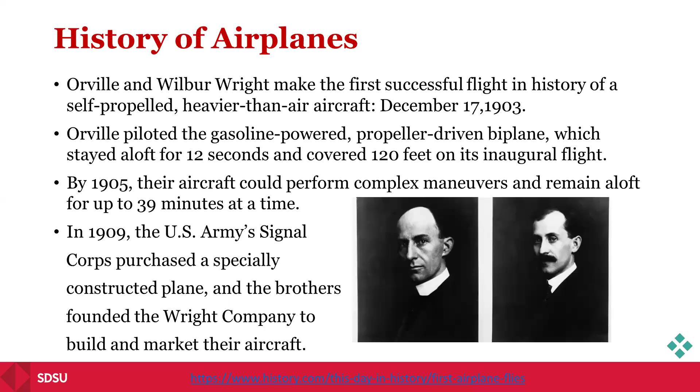And if you look back at airplanes, we have a lot of advancement in the past 100 years. But of course, the most progress was made in the early 1900s, when the Wright brothers invented the first airplane flying for 12 seconds, and then later on we moved on to propeller airplanes, and then we have jets, and now we have supersonic fighters and all kinds of airplanes.

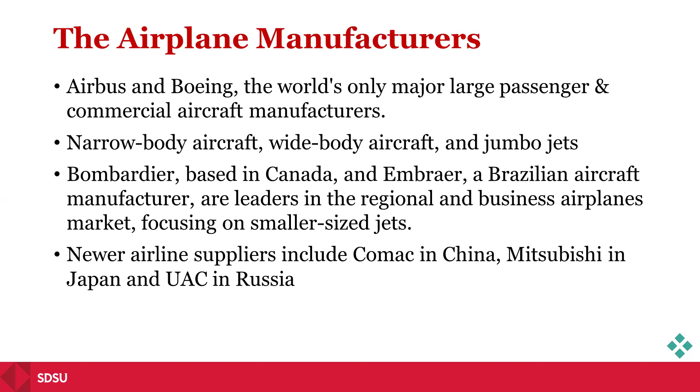But if you look at the manufacturers, there are really only 2 manufacturers in the world right now. One is Airbus, the other one is Boeing. They make commercial airplanes and also military airplanes. You have some smaller ones, like Bombardier, they make smaller jets. There are also some new airplane manufacturers emerging, but it's going to take them some time to really take the market share, like there's one in China, the C919, there's one in Japan. So they're doing some great work.

But if you look at the airplane industry overall, we have a few issues we might actually not notice. One of the issues is emissions. You might not know that on a per passenger per mile basis, an airplane emits more than the passenger car. Because air transportation becomes more and more popular, even though right now air traffic emission counts very little in terms of total CO2 emissions, over time this is going to increase 4 to 5% every year. So therefore, it's going to become more significant in the near future.

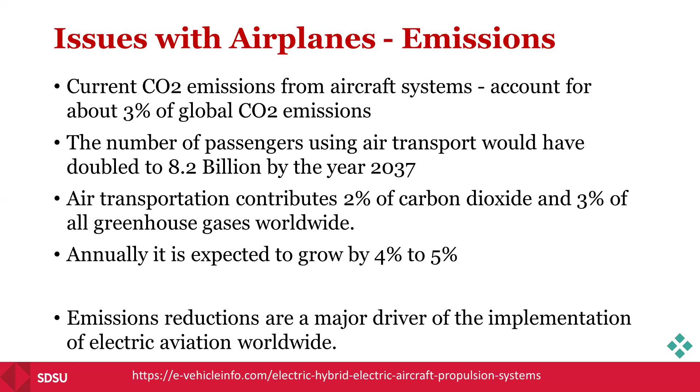And the other aspect of airplane emission is that most of the emissions happen in the air, which has more impact in terms of global climate change than the ones on the ground. It takes time for those things to travel to certain places, and it's global. It's not just emitted in the US and impacting the US, but actually it moves with the atmosphere to different places.

So with all that in mind, there have been talks about transferring airplanes to be more sustainable. The ways to do that include sustainable aviation fuel, where instead of using jet fuel, you produce fuel from food waste, things like that. But then more talk is: can we do electric? If we can do electric, and if we can produce electricity from renewable energies, then we'll be solving this emission problem. Right?

But if you look at one of the airplanes as an example, I took the 747, probably not the largest, but one of the largest airplanes. And if you look at the fuel consumption, it's equivalent to about 56 miles per gallon per passenger, right? So that's what I'm saying. It's probably worse than a passenger car. For a passenger car, if you take 2 or 3 people, it will be much less than that.

But if you look at the total energy consumption, it's 2.4 gigawatt hours for the airplane to fly one way, for its whole distance, say from Los Angeles to Shanghai, one full flight. That's a lot of power, because a lot of power plants only generate a gigawatt, and it takes about an hour to generate the whole electricity needed for flying one run, right? Of course, generation is actually not a problem.

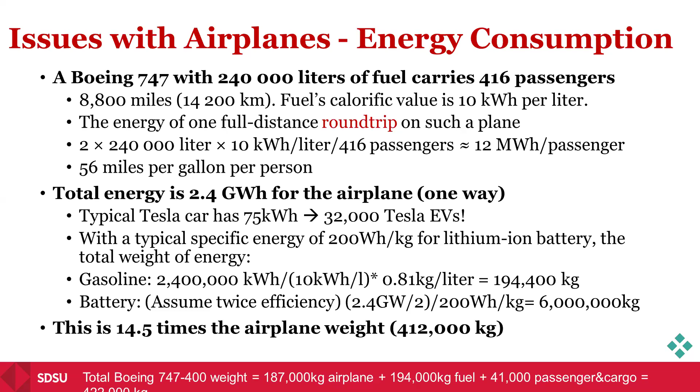Okay, so that's the bottom line: it is not likely to happen with the current battery technology. But we have been increasingly using more electrical power in airplanes. You can consider a lot of the entertainment system, de-icing, also maybe a lot of flight control, things like that. They're more electric, but they're not electric airplanes. So that concept is called more electric airplanes. We're doing more electric than we used to do, say, 10 years ago, 20 years ago.

We're doing more. When we do more electric, we need more electricity. And that electricity right now is generated from the gas turbine. The gas turbine drives the electric generator, and the electric generator produces all the electricity you need. And also you have an onboard battery to supply power when the engine is not working or working at extremely low speed. So you have a lot of this electric equipment. You have generator, and then you have battery.

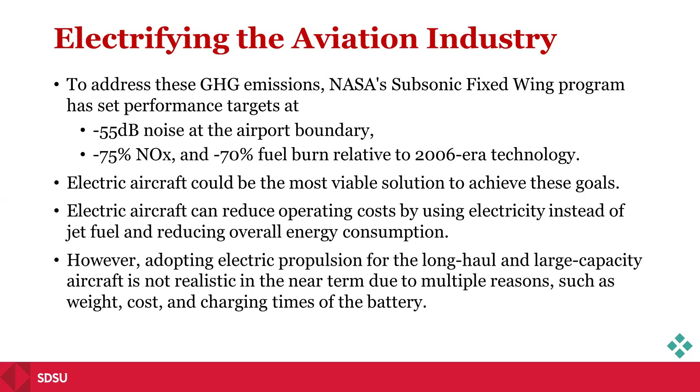The Boeing 787 is the first one to put a lithium-ion battery on it, and also the first airplane that had the issue with the battery being on fire, and they had to address the issue for some time. So doing more electric really is just helping the airplane, in terms of weight, for example, it reduces hydraulics, so it reduces weight, and also in terms of flexibility, it helps with the control.

So therefore, we kind of improve the performance, convenience, and reliability, a lot of aspects of the airplane, but not electric airplanes. Because of the weight of the battery, it is not possible to build a pure electric airplane at this time. So the industry has been focusing on smaller airplanes, and particularly on electric vertical takeoff and landing airplanes.

The reason is that these eVTOL aircraft are small. They don't need a runway to take off. So you can take off from, say, a backyard, or you can take off from a roof of a hospital, and you can land in any place where, say, you have a disaster area where you can do rescue. You don't need a runway to go. So the function is very similar to a helicopter. Right? So this is good.

For example, urban transportation. Nowadays, for example, you have a helicopter to transport the president from the White House to Air Force One. So that's done by helicopter. And we have celebrities in the Beverly Hills area. They go to work somewhere else or play golf, and they don't want to be in congestion, so they take a helicopter somewhere and it saves them time, right?

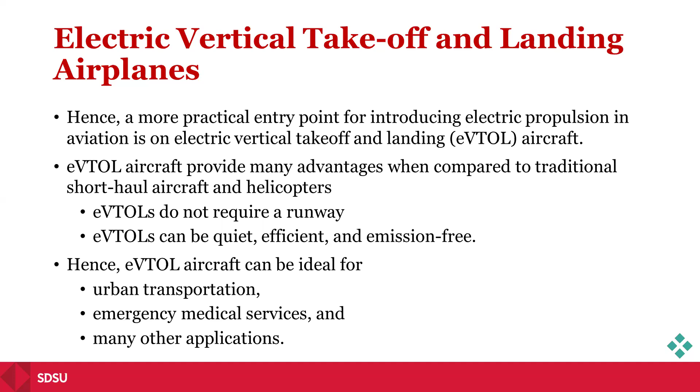So one of the propellers is dead. It's okay. Even if half of the propellers are dead, you will still be able to survive in the airplane. So reliability-wise, safety-wise, it definitely is going to be better. So that's why it takes a lot of interest from the general public saying, well, let's do it.

But the problem that we have today is that we need a battery. Even with the eVTOL, the battery energy density is too low. The battery is too big. If you've got 600 kilograms of battery, it's enough to fly for like 30 minutes. Now, if we reduce the battery weight to 150, let's say, you can ride like 4 more people in an airplane. So basically, it's a weight issue.

And the cost is one of the issues. Batteries are still expensive. The unit price is not bad, but think about this: the battery only lasts for 1,500 cycles. If the airplane flies, let's say every charge you fly once, and you fly say 15-16 times a day, you can only fly 100 days. The battery will be no good. They have to replace the battery, right? So from that perspective it's expensive.

And so we have a project with DOE on developing this new battery that can reach 1 kilowatt-hour per kilogram, which is 4 times better than what we have today. The best commercial lithium batteries today can produce 250 watt-hours per kilogram. So we're doing this one. We are one of the recipients. There are 11 recipients in total. Everybody's working on developing batteries that can do better for eVTOLs.

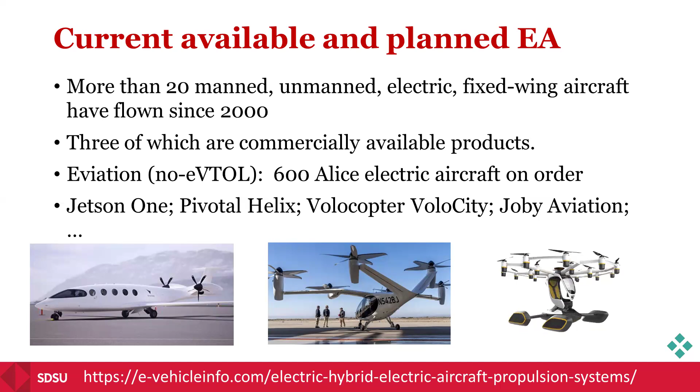Of course, I want to be cautious in that this thing is still expensive, it's still early stage, and it's not for everybody. When I go places and people know that I do this, they ask me, okay, can I buy one that I can drive to work? I say, no, that's not going to happen, because if everybody drives an eVTOL, it's not safe for sure. Right? We've got automobiles on the road. There are so many, and we know there's already congestion, and there are always safety concerns. So these companies, as of early 2025, you can see some of them can travel 300 miles, some of them like 16 miles.

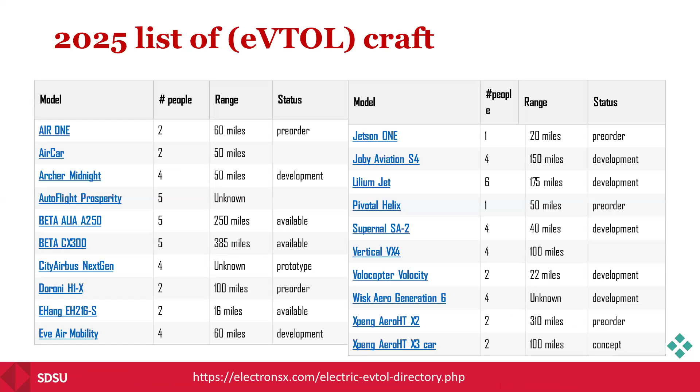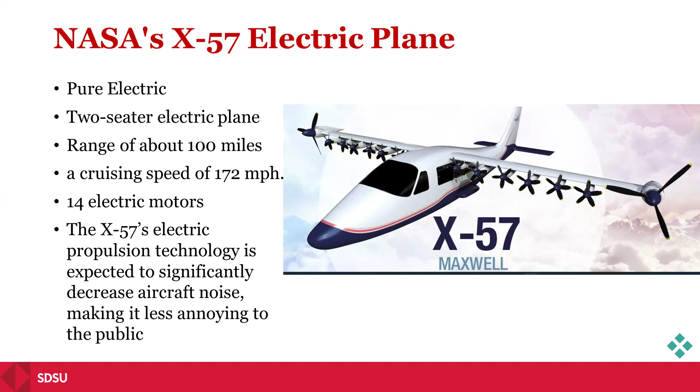Some of them 1 person, some of them 2 people, 4 people, 6 people, and so on. In fact, the earliest one was designed by NASA as a demonstration project, and this one can fly 100 miles at a speed of 172 miles per hour. It uses 14 electric motors, some of them for lift, some of them for cruise. So this is kind of becoming the model for eVTOL design as a baseline. If you want to design something, you can use that as a base model to compare.

But when we say that electric is not likely possible, nowadays we're talking about hybrid. So hybrid may be a possibility in the middle term, and maybe in the long run, when we have a better battery, even the one with 1 kilowatt hour per kilogram, it's still not likely to be for long haul airplanes. Maybe good for eVTOL to increase range from say 30 minutes to say 2 hours, or maybe payload from four people to maybe 10 people or 20 people, but still not good enough. Let's say flying from Los Angeles to New York, it's not likely because it's going to be too much weight on the airplane.

So in the immediate time, it's likely that we might see hybrid airplanes existing, just like electric vehicles. From the 1960s, people have been designing them, having prototypes, selling a few, like in the 90s, we were selling the EV1 and so on, but then it comes and goes until only the past 10 years, EVs have started to be fully commercialized, and then people can go and buy one.

So we talk about the difference between different topologies of electric airplanes. You can have, say, the pure electric. You might have a battery, and the architecture provides. You might know that DC-DC might not be needed. It depends on the design philosophy, because adding DC-DC is going to add cost to the system and weight, but it gives you flexibility of the system and also increases the performance of the system. And the reason I said performance, I'll give you one example.

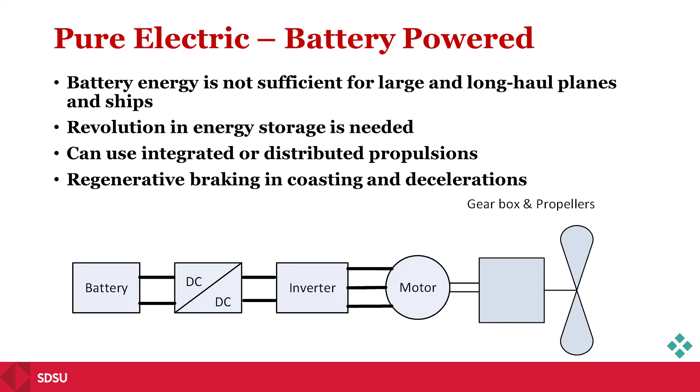If you have DC-DC, you can potentially maintain a constant DC bus voltage regardless of the input voltage. And therefore, your inverter to control the motor will become so easy, you don't have to worry about a lot of control variables, and the performance of the eVTOL will be much better. So this is just one of the architectures with pure electric. Again, as I said, you can potentially remove it, but including it will give you some benefits. In your design, we will have to evaluate. Do we want a DC-DC to get the performance, or do we want to get rid of the DC-DC but reduce the cost? That's the trade-off, right? So you probably have to do an optimization scenario.

And then also there is a trend to look at fuel cells, because if a battery doesn't work the way that we wanted, we can potentially use a fuel cell, because a fuel cell uses hydrogen. Now, how to produce hydrogen is a different story, but at least you have hydrogen. We can carry hydrogen, which is much lighter than the battery, and then we can potentially fly an airplane with a fuel cell. And with a fuel cell, you definitely need a DC-DC; a fuel cell cannot sustain a high dynamic load. Therefore, you would have batteries, because again, the battery is going to supply the high power dynamic performance of the system. So this is what you have with your fuel cell airplane.

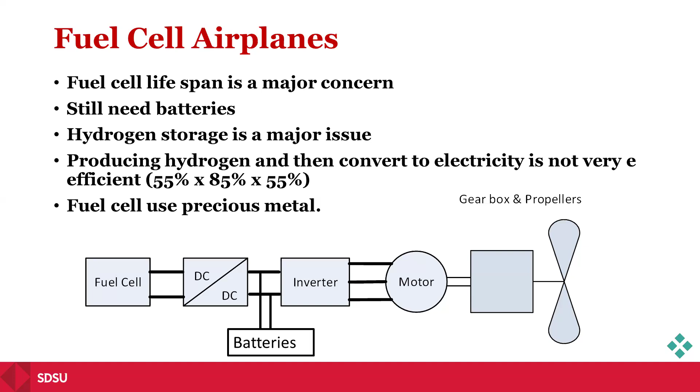It's similar to battery, but just that you would have a battery pack connected to the DC bus. And then if you look at the fuel cell, it's generating electricity from hydrogen, and then you have a motor to drive the propellers. So therefore, if you replace the fuel cell with the engine, you will simply have a series hybrid, where you have an engine to drive a generator.

With a series hybrid, typically we have a smaller engine, and then we have a battery to supply the peak power. But of course, in an airplane, the engine size has to be such that you will be able to do the cruising of the vehicle for whatever conditions that you might encounter. The only thing is the battery would supply power in turbulence or in the takeoff period, when you need more power, and this comes in to provide more power.

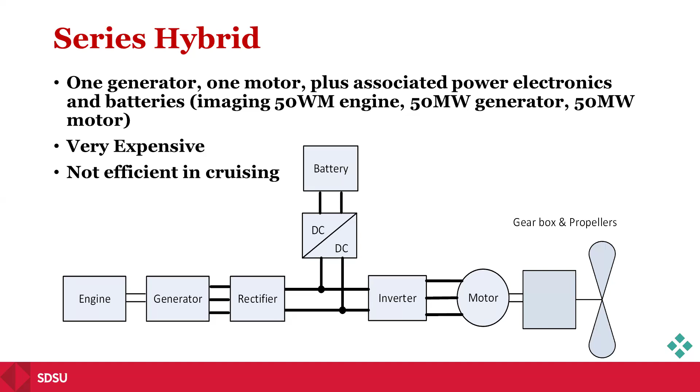And then there is also, so if you look at the previous diagram, we have a battery over here and a DC-DC to manage the DC bus. But if you remove that, this will become what's so-called a turbo electric, which means they don't have a battery. Of course, they might have a battery for the auxiliary power, but they don't have a battery for the propulsion system. So directly, you have the engine provide power to the generator, rectifier, inverter, and so on.

So in this case, the advantage is that you have a better propulsion performance, but the disadvantage is that instead of using the engine mechanically driving the propeller, you have to have two stages of power transfer. So the efficiency may not be the best. So when people talk about this with other advantages, then you might use it.

Also, we could build a parallel hybrid, because with a series hybrid or with turbo electric, the engine has to be sized such that it provides all the power you need. But in a parallel hybrid, instead of the series connection, we have a mechanical coupling device where the engine comes in and a motor comes in, and their mechanical power is added. The mechanical coupling is designed such that you can either add the power of the engine and motor, or you can split the power of the engine so that you can use the motor as a generator to charge the battery.

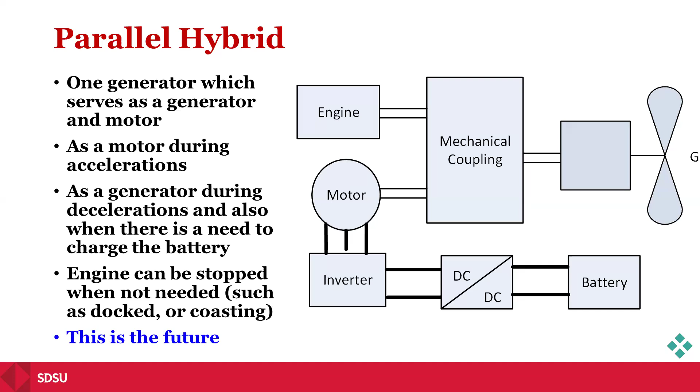So that previous one is basically a parallel hybrid, but similar to electric vehicles, we can potentially design a series-parallel, which means we have an engine driving the mechanical coupling with a motor driving it as well. And then you have a generator, which takes power from the engine to generate electricity. So with this motor and generator, you can balance the operation of the engine such that you get the best efficiency out of the whole system.

And this is particularly important in hybrid electric vehicle design, like the Toyota Prius, which is a typical model of this. Because of the city driving, the fuel efficiency is significantly improved. But in an airplane, again, this model might not give you all the advantages you have in an electric vehicle because airplanes tend to run at a constant speed and constant power. But again, this is one of the potential opportunities that you might want to look into.

In terms of propeller design, most traditional airplanes today have 2 engines, right? 1 on each wing, and the 747 of course has 4 engines, and those engines look like they're balancing the force, right? But actually they also give you redundancy. If one engine fails, the other engine would still work. The pilot just has to maneuver the airplane in a way that balances it. So it's good, but still, sometimes it just happens that both engines fail, and then you have a fatal accident.

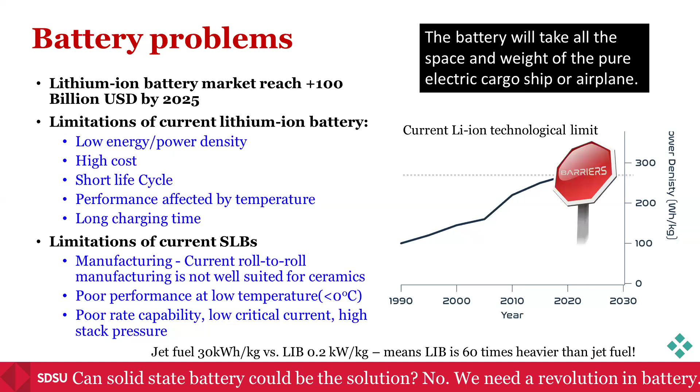So we're developing better batteries, okay? And I have been working with some colleagues to look at nuclear batteries to see whether they can provide the power and energy we need. Now, a nuclear battery is not actually a nuclear reactor; it's nuclear radiation, which means this system is relatively safe. The nuclear reactor, if it fails, it explodes. If this system fails, it just emits radiation, so it's not going to explode, right? So that's a good thing about this one.

Now, of course, it emits, but we have shielding, so the emission won't go much beyond the shielding. So this system is 100% safe, so you don't have to worry about nuclear. The only thing is how long you can use this system and eventually how you recycle it. At the end of the half-life, we have to recycle them somehow. But it's better than nuclear reactors because this radiation becomes lower and lower, and eventually it can just be disposed. Nuclear reactors, when they retire, still have a lot of radiation. It takes about 30,000 years for the radiation to totally go away, okay?

But anyway, the energy density is very high. It can go up to 400 to 800 kilowatt hour per kilogram. But the problem is power. Every kilogram produces like watts, maybe less than watts. Which means you put a lot of weight, you get enough energy, but you don't have enough power. So if you put in enough power, the weight is going to be too much, and your airplane, again, will not take off. Okay. So we have a problem.

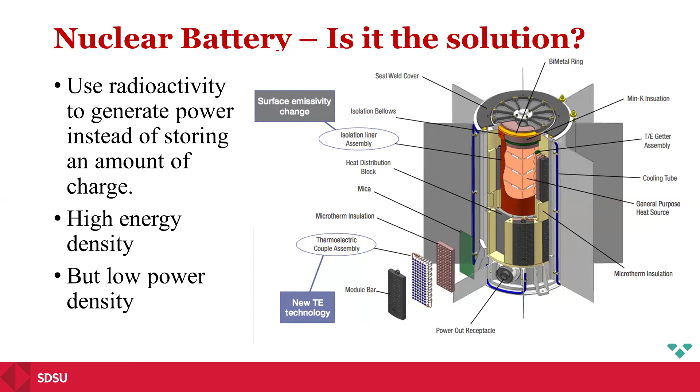And we looked at a few design examples. The previous example I gave you was a large airplane, probably one of the largest, and one of the longest distance, about 8,000 miles. But I know the 747 can fly nowadays well beyond 10,000 miles. Then we looked at this intermediate airplane, not international, but a domestic long haul airplane, like from Los Angeles to Maine or Boston. So we took this airplane and found some parameters. We want to see what kind of battery we need to cover this airplane, so that at least the battery people have a target.

Okay, we're going to work towards that goal. Maybe not now, maybe 5 years, maybe 10 years, maybe 20 years, or maybe even 50 years, right? So we can realize that goal. We can fly pure electric airplanes.

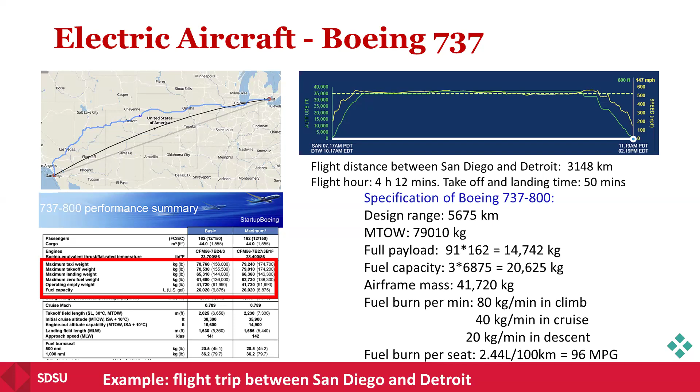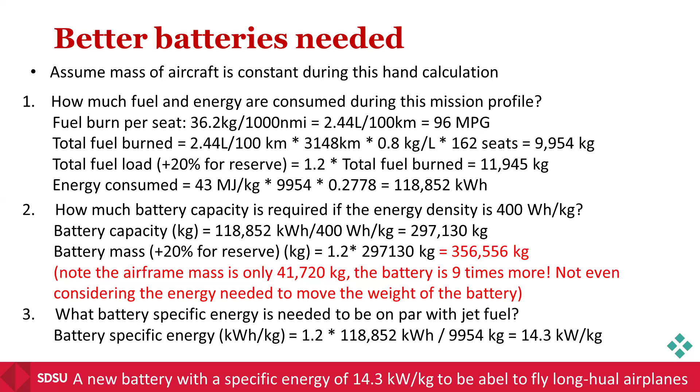Okay. So now, let me go back one slide so you can see. If we say we want to carry the same weight of jet fuel as a battery, what kind of battery energy capacity would you have to achieve? We found that we need 14.3 kilowatt per kilogram. The best battery in the laboratory we have today is 400, so 0.4. So we need to increase energy density by more than 30 times, almost 35 to 40 times, to get what we need in many years to come.

Then we also had an inquiry from a shipyard, and they said, can we do ships? The airplanes have to worry about weight, but ships, no problem, they can carry weight. So we did an example from Japan to Los Angeles, and found some interesting information like range, weight, fuel consumption, speed, and things like that. We found that the fuel we need is like 3.5 gigawatt hour for this ship to travel that kind of distance. Again, this also includes 20% reserve.

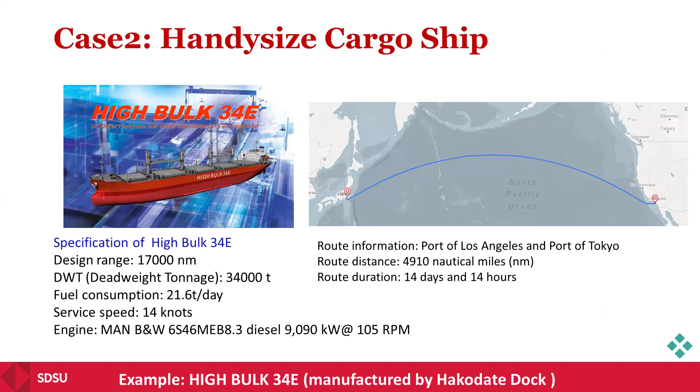So if we carry a battery at 400 watts per kilogram, how much weight of battery? 10,000 tons of battery. And remember the tonnage of the ship? It has 34,000 tons. So this is almost 1/3 of the cargo ship weight. Do you want to sell this to a cargo shipper? They'd say, if I can carry 10,000 tons of goods, I can earn a lot more money than carrying battery around.

Okay, so then what if we carry the same weight as the fuel and achieve the same distance, how much energy density do we need? It turned out to be like 11.1 kilowatt hour. The airplane was 14, so not so much difference, really. So this is the fact that you have. So then we talked with this company about, can we build a hybrid?

You can build a hybrid, potentially we don't need that much battery. We can put some batteries and we still have the engine with the battery. If we can reduce the size of the engine, then we can potentially save some money, and we use that money to build this electrical motor and battery, right? So we can get the efficiency better. You will still be saving money because the efficiency is better.

So this is the architecture with a parallel hybrid, with the engine, and then you have the electrical motor, you drive the powertrain. Okay, and well, it turned out that yes, ideally this would work similar to an electric vehicle, but the problem is for a ship, for 14 days of travel time, 12 days they're traveling at constant speed. They're not changing. So adding this extra system there doesn't do anything for 14 days.

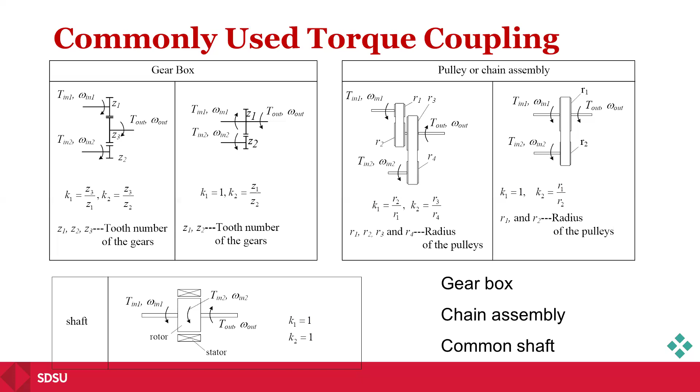Of course, in the ship, the motor was like that big, a couple meters tall. So adding that motor in the middle, having that shaft, mechanically it's just such a difficult thing to do. But that's more like a mechanical engineer's problem, not my problem. I can design the motor.

And then in addition to the torque coupling, we can also do speed coupling. In the speed coupling, we basically add the speed. And when we add speed, the torques are proportional. So K1, K2 are the torque ratios. And you might say, okay, why do you add speed? Well, at the end of the day, what is the power? Power is torque times speed, right? So if the torque is the same but speed is increased, you would increase the power. All you need at the end of the day is how much power.

Torque is important, but torque is only important when, let's say, you're starting the system at zero speed, you don't have power, but you still need torque, right? But at normal operation, speed is important. How do you do speed coupling? How do you add speed?

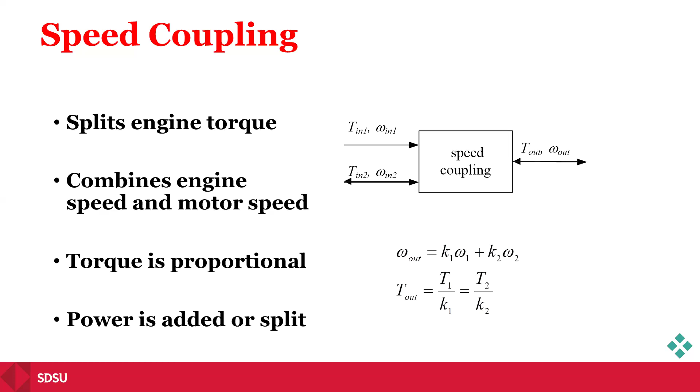The most famous method is to use a planetary gear. With a planetary gear, you have a sun gear, a ring gear, and a carrier as the output. With the sun gear inside and ring gear outside, the speed is added. And the torques are proportional to each other when they're rotating. You can also block one of the gears. You block the ring gear, for example, and you only transmit from the sun gear to the carrier.

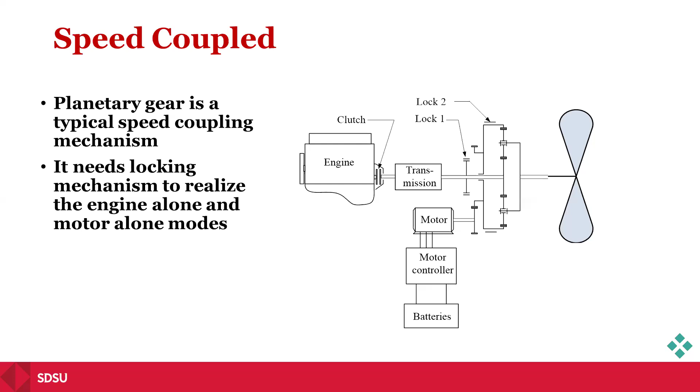And you block the sun gear, you have ring gear transfer. So this is a very easy system. Of course, for small power it's easy, but for high power, such as the electrical ship, it's very difficult to do. And then you have other topologies you can do.

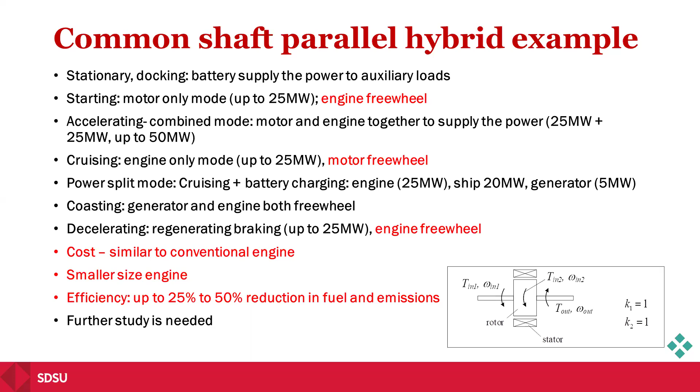So a common shaft is one that I think might work, if we can resolve the mechanical issues like the torsion and all the balancing and all that stuff. But luckily there's no high speed generally, so it's not bad. And we can potentially address a lot of issues with the motor. You have the input engine connected here, you have the propeller connected on this side. So that is probably one of the best ways to do it.

So in a nutshell, electrical airplanes and ships are not even available for middle-sized and medium distance. But small, short range eVTOLs are potentially something that we're going to see huge progress in within the next couple of years, because we already have commercial ones available. There, of course, a lot of research needs to be done to optimize the system design, things like that.

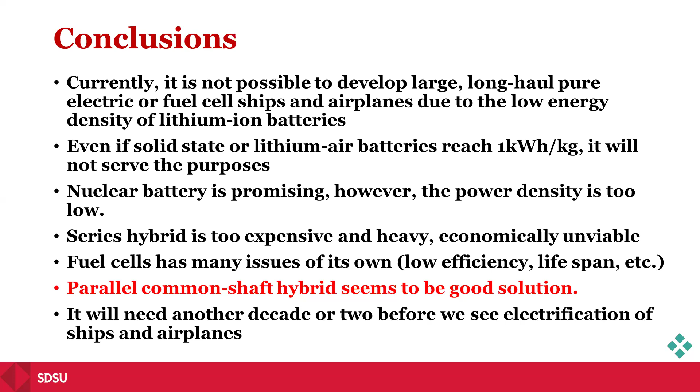And the battery needs significant work in the next few decades, I would say, in order to have pure electrical airplanes and ships. And in the meantime, we need to study whether parallel, series, or any hybrid structures or even fuel cells would make sense to build airplanes and ships. Because they may or may not, we don't know. On the concept, you see there's some advantage, but there are certain things that are not ideal. So we need to do a lot of research to get to that point.

Maybe I have a few more minutes. I'll just give you a brief overview of the research we've been doing at San Diego State. Now, for some of you, if you don't know San Diego, it's only about 3 hours traveling from here. We are a very nice city.

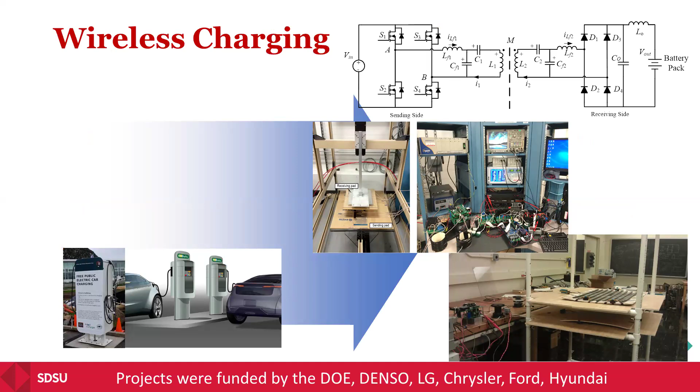In my research group, we have some research in wireless charging. We focus mostly on high power stuff like kilowatt EV charging. We have some publications in the past on low power things, but not much. And we also do a lot of work in battery management systems. We're working on wireless BMS, trying to eliminate the connections and soldering points to increase the system reliability.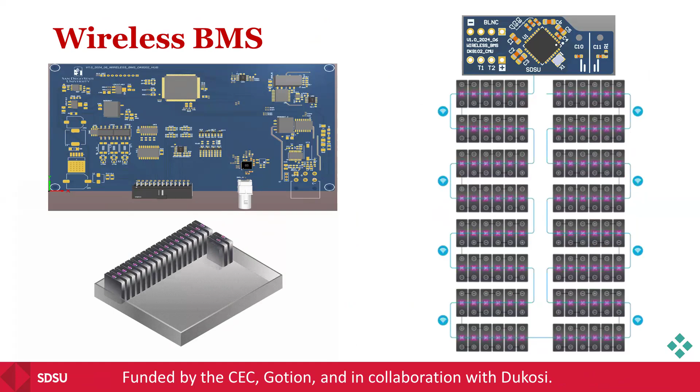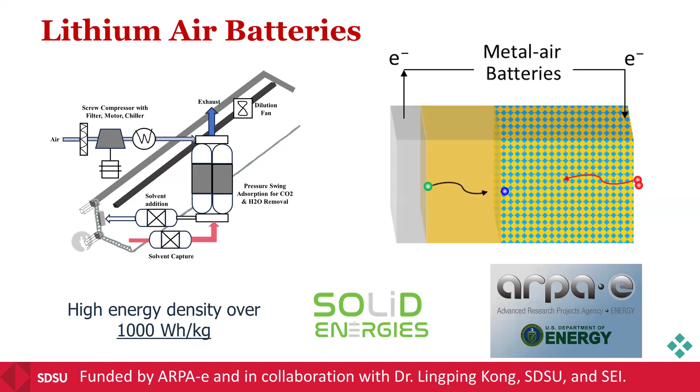And earlier I mentioned this ARPA-E funded project to develop a new battery that can achieve much higher energy density. So this one is a lithium air battery. We already achieved 1 kilowatt hour per kilogram, but it's still not good enough.

Another project funded by the National Science Foundation was looking at cybersecurity, because with all the power electronics in our systems, like EV charging, renewable energy, and so on, there's a lot of potential that people can hijack the controller of the motors and inject fake signals, so that your system sees a huge problem that can trigger a fault and your system can collapse. So we're doing a study to identify cybersecurity threats and how to mitigate them.

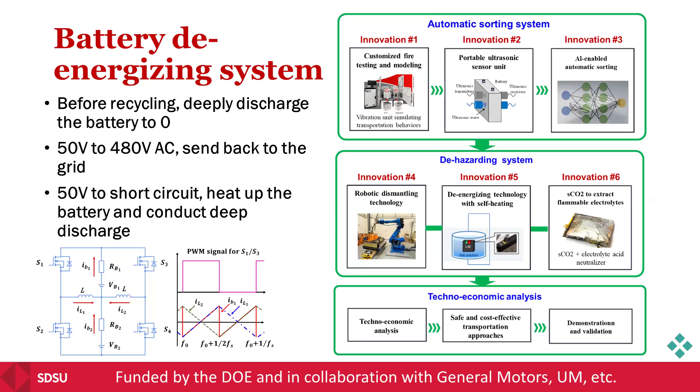And we were also recently granted a project from the DOE to study battery end of life recycling. Before the battery can be recycled, we need to de-energize the battery. We can't really de-energize the battery easily, so it's kind of a problem. But unfortunately, this project is still on hold, so we are hoping to get the project started.

We're also doing some research on second life batteries. When batteries retire from EVs or airplanes, for example, they are not really ready for recycling because they can still produce quite an amount of power and energy we can use for something else. Professor Xiaofan is also doing some research on this topic. We have done this for a couple of years, and we did a laboratory study and a demonstration deployment, trying to see how these batteries can be used and whether it makes sense economically.

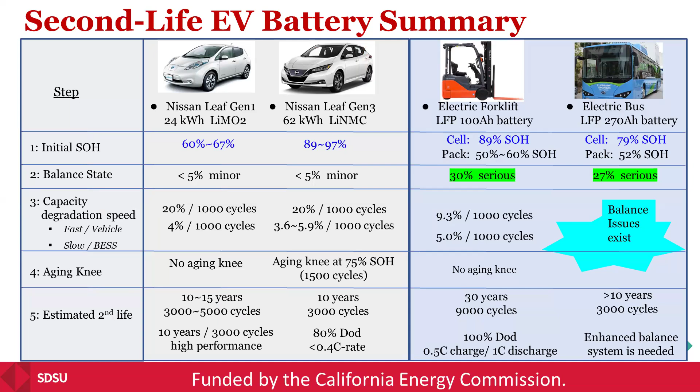And in order to understand whether it's going to make sense, we did another system design using new batteries, so that we can have a fair comparison between used batteries and new batteries. But unfortunately, it took us so long, even for new batteries, to get a permit to install the battery.

We started this one last year, so it's almost 1 year. So we're hoping to get our permit like next week, and then we'll have to go out to meet the construction, take many months, and so it takes about a year and a half, 2 years to get this system up and running. So it's really a pity that we cannot do. But the good thing, of course, once we have the system up, we can compare with our second life battery. We can compare the operating, the safety, the advantages, the performance, all kinds of things.

Actually, the one more thing we can do is in the process of developing the second life battery, we develop an energy management system. And I told my student that we want to make it universal so that we can use that to control our new battery as well. So we're going to validate our EMS software within this new system.

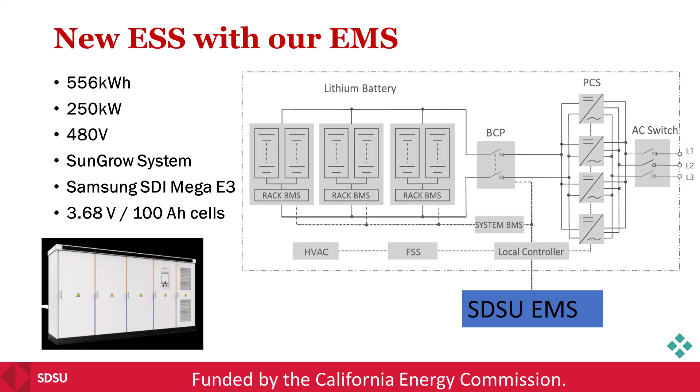So this is how the system looks like. In real time, you can see the power flow, and you can see the status of each battery pack, whether it's used, and you can optimize the operation of the system so that it can help you save more money for the same amount of electricity you use. And then, on your cell phone, you can see the real-time power flow and the status. If something happens, you can press the emergency button, the system will stop and decouple from the grid.

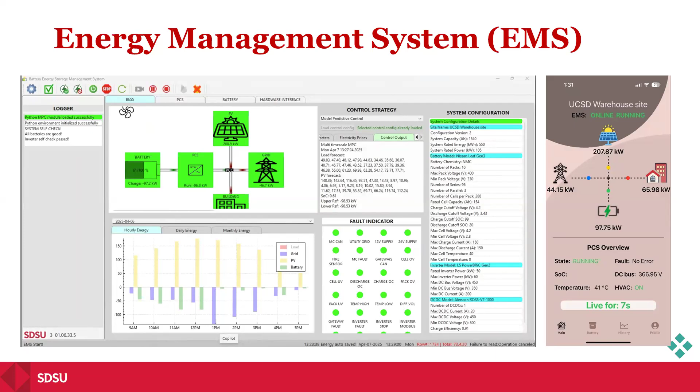recycling process itself, not just the last step of purifying, but also including the battery disassembly from a vehicle and transportation, storage, de-energizing, and disassembling to get the metal, like aluminum, steel, copper, plastic, and get rid of electrolyte. This is a huge process involved. So therefore, it may or may not be. We don't know yet. So it's something that we're actually working on.

How does the flight dynamics change when the weight of the airplane is constant? Unlike the Boeing that loses more than half its weight by the end of the flight. Yeah, that's a good question. We have colleagues from UCSD studying the flight dynamics. I mean, basically when you use the energy, the weight of the vehicle doesn't change. So the battery is still there, the weight is still there, the energy is gone.